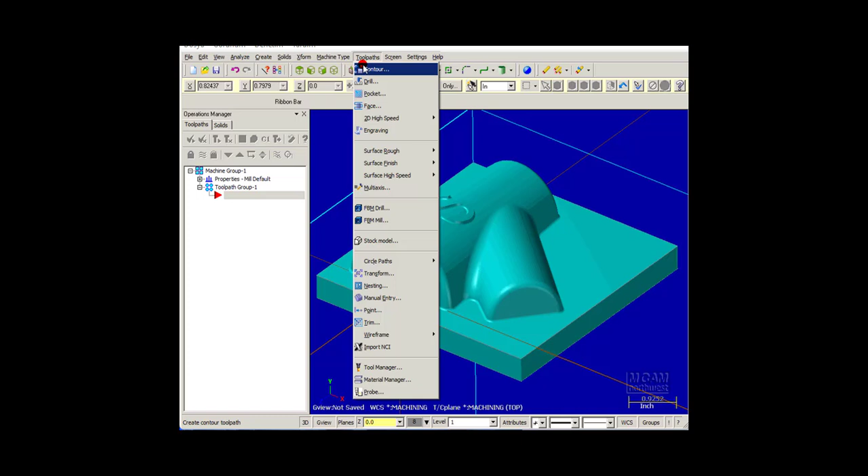We'll find that under Toolpath, Surface High Speed, and then you'll notice Opti Core, Opti Area, and Opti Rest. This part is going to be using the Opti Core toolpath, and then I'm prompted to select my drive surfaces. Now the general strategy with the high-speed surface machining is to select the entire model as a drive surface.

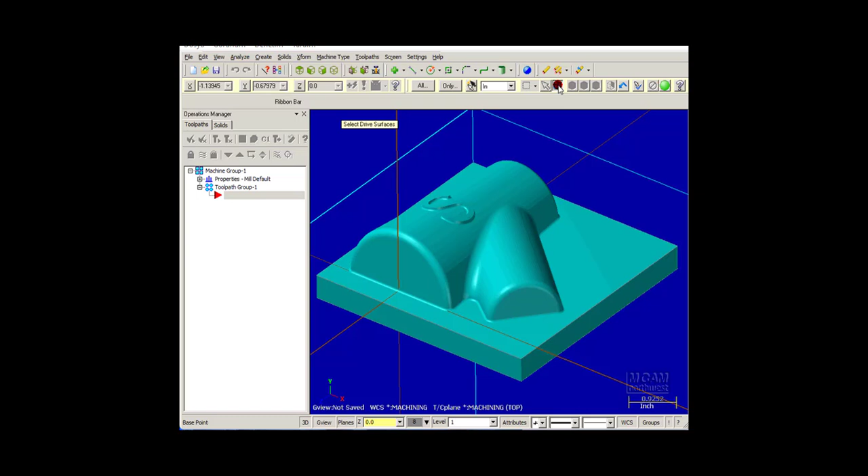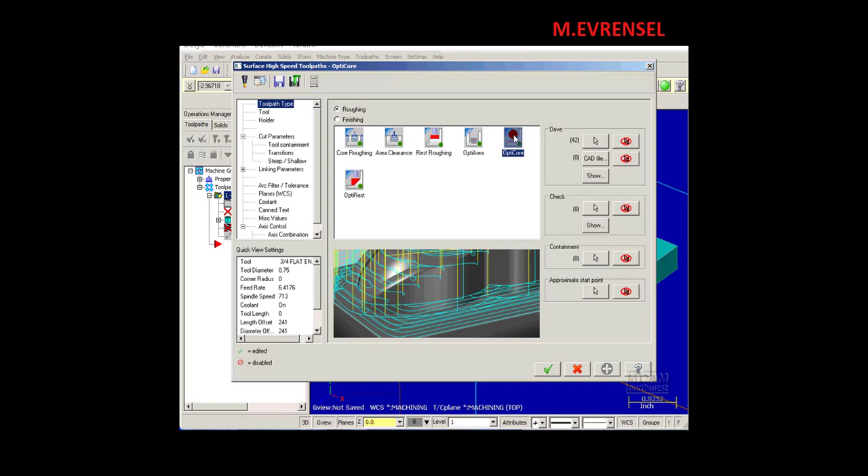So I'm going to go into solid selection mode, turn off face, but have select body turned on, click on the model, OK, and it shows I have 42 drive surfaces. These are all the various faces of the solid model. Since I pre-selected Opti Core, this is highlighted. If I change my mind, I could easily select different toolpaths right here. We'll leave it on Opti Core.

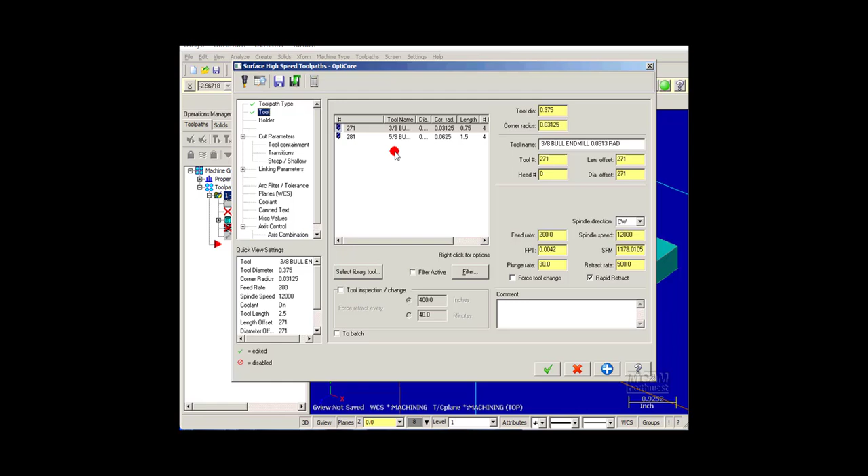Onto Tool Selection. Now we're going to see these toolpaths are very unique. The general strategy for using them is use a smaller diameter tool than you might traditionally, but use a very fast and light feed rate. So with the traditional toolpath, I might use a 3/4 or a 5/8 end mill. But with this part, I'm going to select a 3/8 end mill. My feed rate is going to be pretty quick at 200 inches a minute.

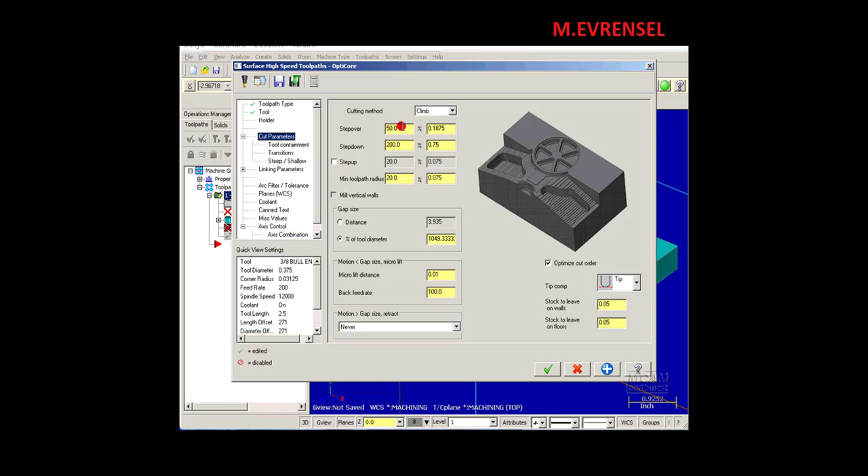Now these fields here are extremely important to be setting. This is really what makes or breaks your success with these high-speed dynamic type of toolpaths. So the key to using these is having a large step down. Generally, twice the diameter is no problem at all for these toolpaths, as long as we have a step over that's very light, and usually it's between 10 and 20%. I'm going to have 15% here, middle of the road.

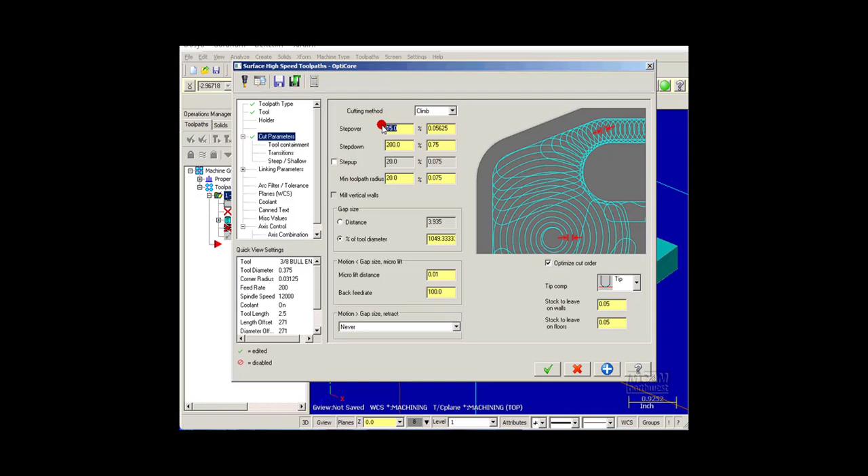That shows me I'm having a 56 thousandths step over, so it's a light XY step over, which we can see in the picture here showing me what that step over is as far as the terminology. The final key to this is the toolpath radius. And I click on that field, and it shows me what that is. That's the actual radius that the toolpath cuts in the corner.

This toolpath will never go in and use the full radius of the tool. It will always make an arc motion. That's what makes it possible to feed at an extremely high feed rate comfortably. So the toolpath radius, this generally is set between 20 and 40%. Let's just set this to 30%, middle of the road here. So in any corner situation, it's going to be cutting 112 thousandths radius. We're going to see this when we backplot the toolpath.

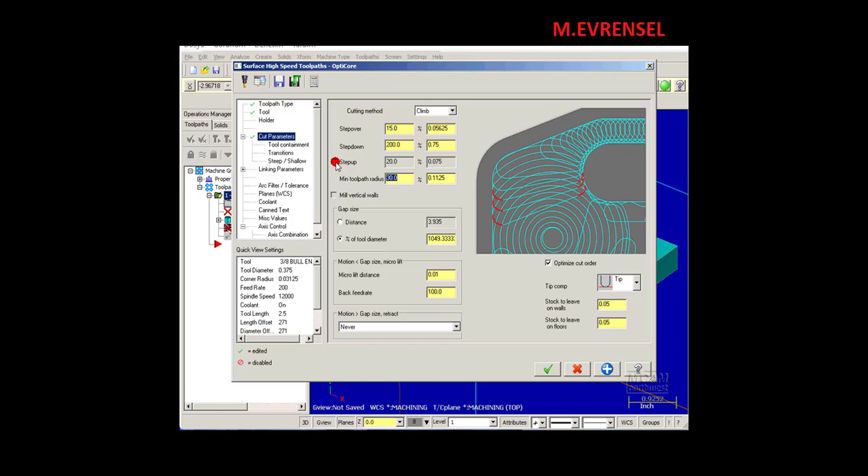So these three fields, step over, step down, and toolpath radius, are the keys for any dynamic milling. Now the Opti toolpaths also have step up. If I turn that on, click in the field, you can see a picture here. Now the way these toolpaths work, it takes the large step down of 3/4 of an inch. After it does that and evacuates a lot of material, it's going to be taking step ups to smooth the model out.

And I'm going to set this pretty fine here, let's say 10%, so 37 thousandths. So now that I have my key features set for my Opti toolpath, I'm going to go through and set some of the other ancillary settings.

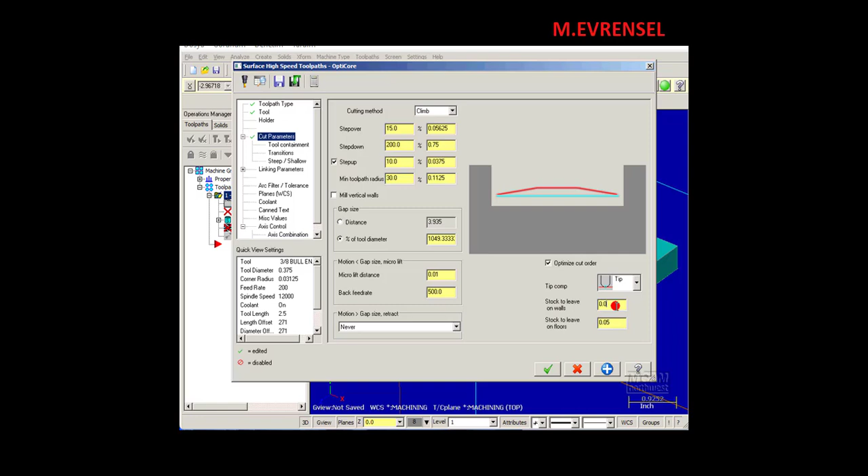So the back feed rate, this is when the tool is repositioning and not cutting. Set that to 500 inches a minute. And I'm going to leave about 15 thousandths on the wall and the floor.

Now my cut depths, go into steep shallow here. I don't want to cut all the way down to this part, just want to cut the mold part. So Z depths, my maximum depth, right click, Z coordinate, pick the floor of the mold, so -1.25 inches. Minimum depth, Z0 is the top of this part. I'm going to give it a little bit more to cut up top, so I'll give it 75 thousandths.

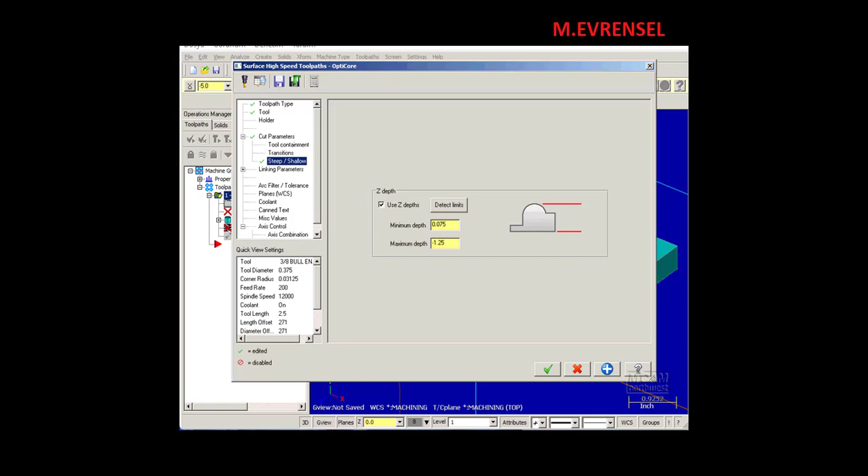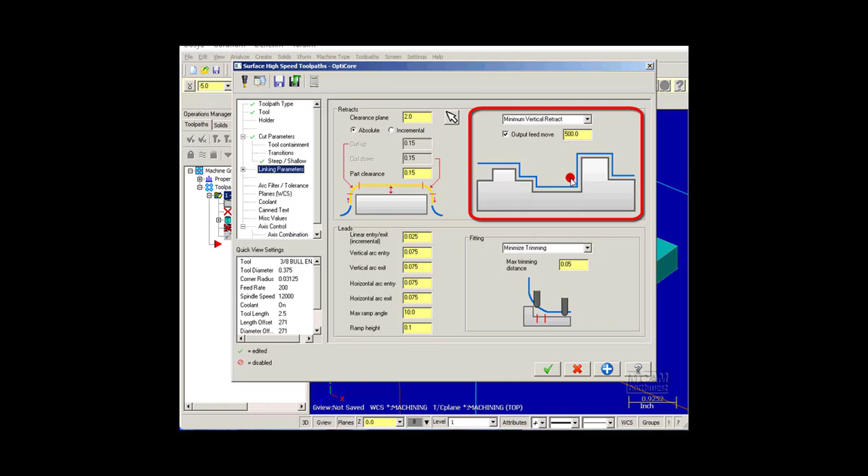Go down to my linking parameters. There are quite a few different settings in here, and usually if you go with the defaults, you're going to get a good result. The only one that's extremely important is this setting here, what the tool is doing when it's repositioning around the part. We have several options here: minimum vertical retract, full vertical retract, or generally the preferred minimum distance. This will output XYZ move the shortest distance.

Now it's extremely important that this output feed move is turned on. So this will be a G01 programmed feed move. Mastercam will always maintain control over the cutting tool. If we turn this off, what's going to happen here is this is going to turn into a G00 move, and Mastercam is going to pass control of the tool over to the machine.

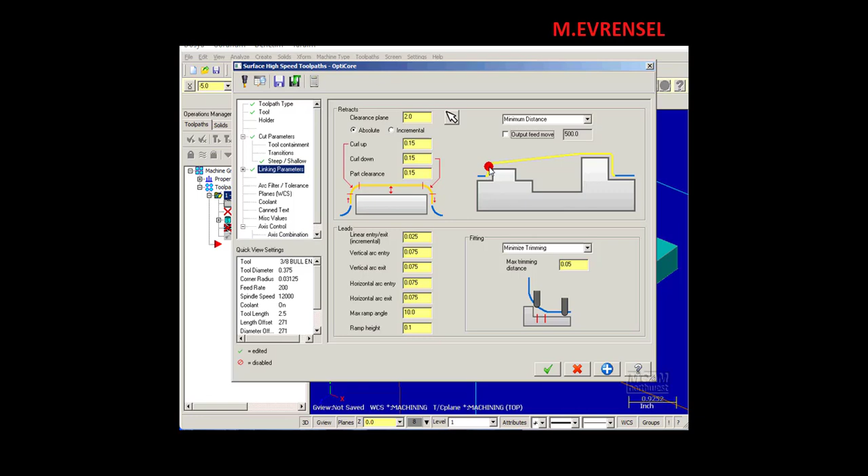And we don't know how that machine handles rapids. For instance, does it move Z first and then XY? Or does it run at a rate so the tool arrives at the program destination simultaneously? Not knowing these factors is a recipe for an inevitable crash. Having output feed move on always maintains a programmed relocation move.

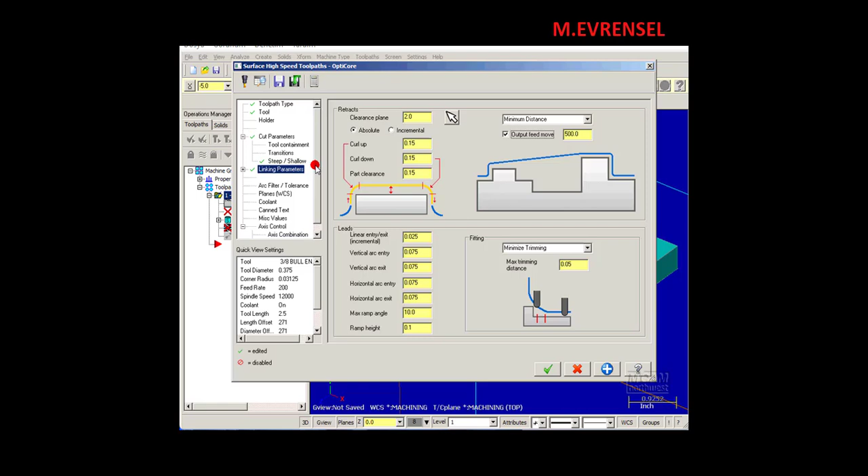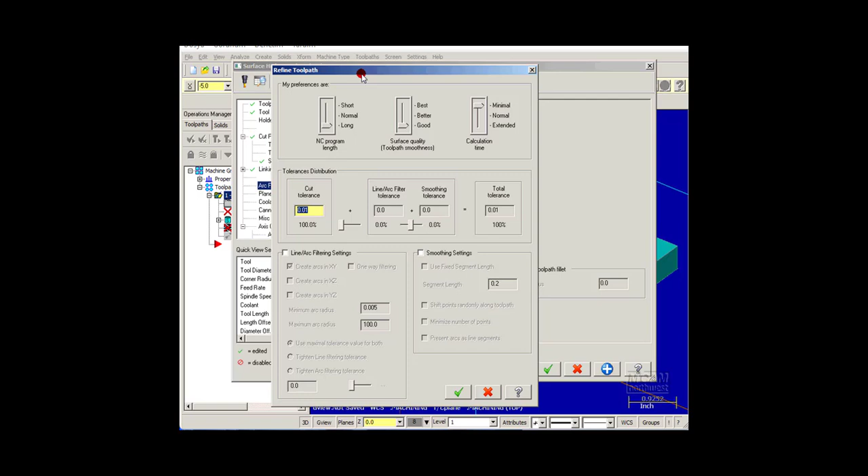The last page I'm going to go into is the arc filter tolerance. Now this is a roughing toolpath, so I don't have to cut it to a really tight tolerance. I'm leaving 15 thousandths on the part, so I'm going to give myself a 10 thousandths tolerance. I'm going to refine the toolpath, and another key here is to make sure the line arc settings are turned on, so I can get arcs in the XY plane. The minimum radius has to be set to at least what my cut tolerance is, so that's 10 thousandths. Everything else I can pretty much leave alone.

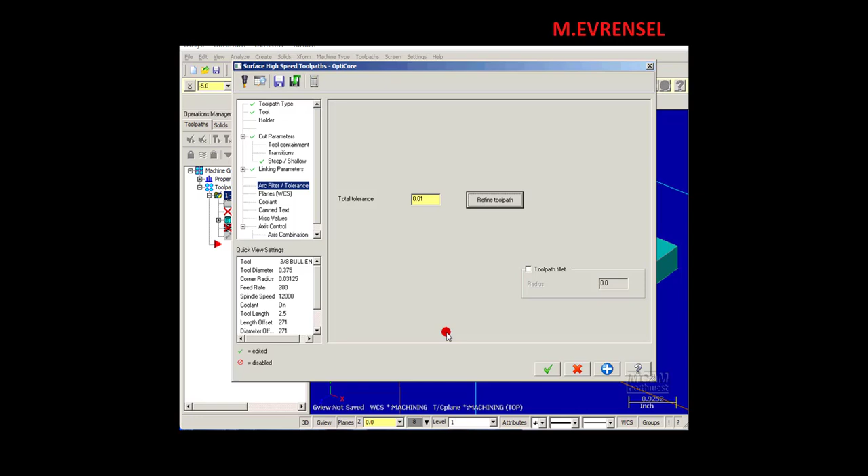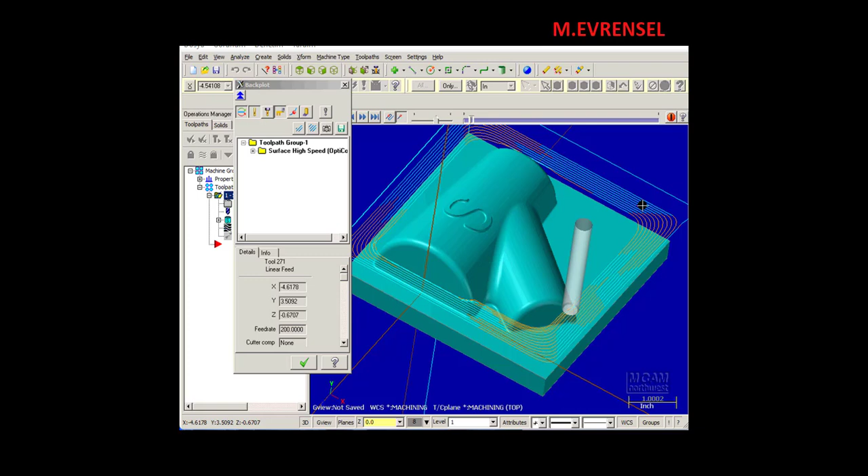Now in this backplot, I have my linear moves as blue and my arc motion as orange. So this is going to be nice smooth machine motion, very smooth on the servos and the ball screws. Now you'll notice the detail: when the tool comes into a corner here, it's actually cutting a radius.

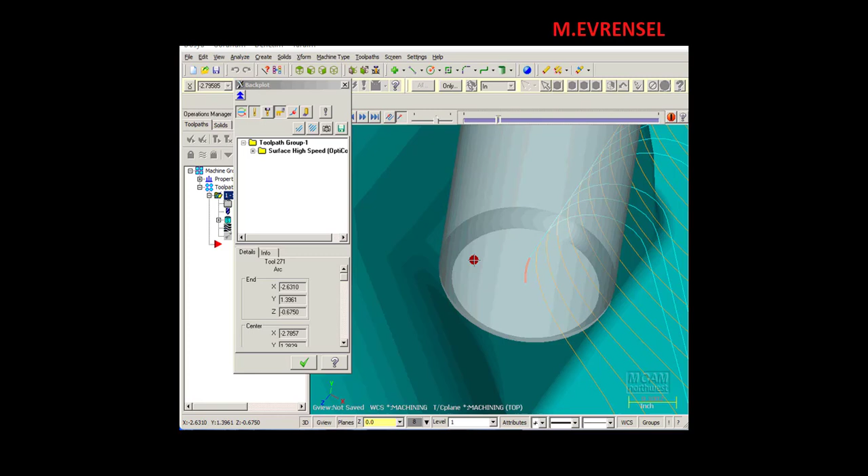It never will go into the corner and use the tool to form the radius, which would no doubt break at this feed rate and this depth cut. So that's the rounding radius we're seeing right there, probably the most important feature in these high-speed toolpaths. So there's our 3/4 inch step down, and here's our step up now that we see.

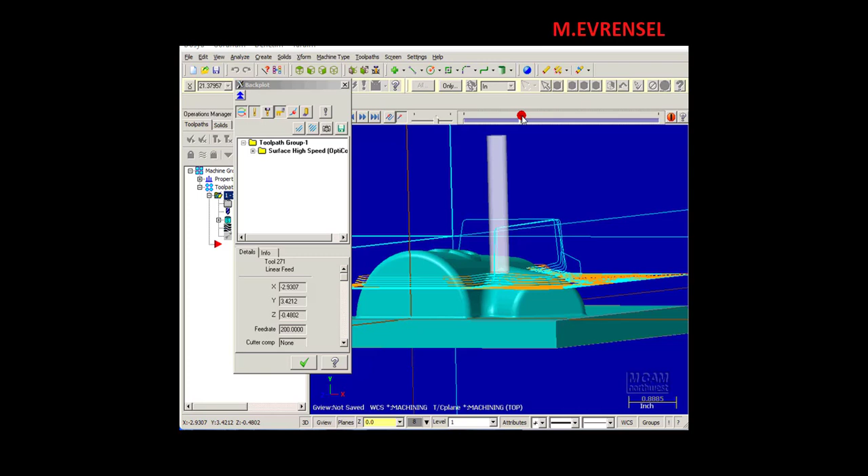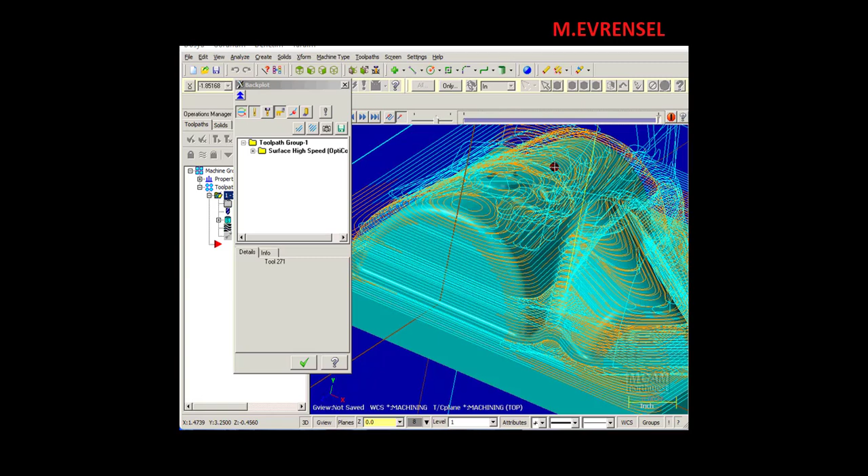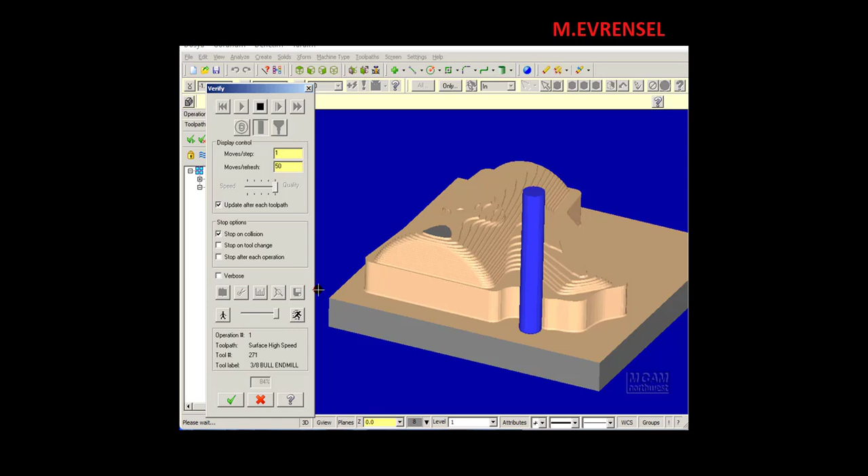So this is roughing and semi-finishing the part with one toolpath. Goes down to our next large step down, and then steps up. Now if we go through a verify, that's a nicely machined part, ready for some finishing operations without any other toolpaths added.